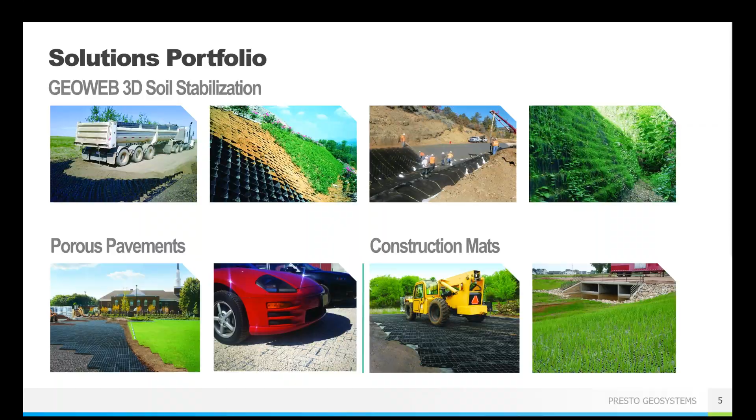First, I do want to go through a pretty general overview of what the GEOWEB soil stabilization system is, for those who might not be familiar with this type of product. Like I said, it started in the 1970s, but it's still a little bit unknown in some areas, so I want to make sure we're all on the same page. The GEOWEB system is our version of the Geocell technology, and it consists of two main attributes to be aware of. The first is going to be the cell or the container size. The cells come in three diameters, small, medium, and large, along with cell heights between 3 and 12 inches. And these dimensions are going to depend on your project specific details, if you have vehicle loading requirements, what your slope angles are, that sort of thing. So we can help you determine which one is going to be the most appropriate for your specific job. There is no one size fits all.

Another thing I want to point out is the ultrasonically welded seam, and that's where all of these connecting points are. The stronger your seam strength, the better the performance the Geocell is going to have. A strong seam allows for heavier infill materials, steeper and taller slopes, and better overall lifetime performance. The GEOWEB panels are produced using a high-quality virgin high-density polyethylene, HDPE resin, for consistently strong welds at every cell junction, while also maintaining semi-rigid ductile properties within those cell walls. If you have too stiff of a cell wall, it can lead to overstressing of the seams and the potential for cell rupture or failure.

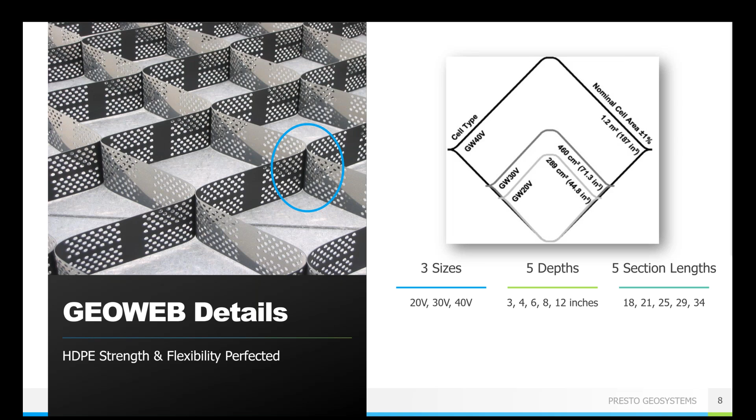So our Geocells do not use any fillers or exotic polymer alloy blends, which can ultimately reduce your weld strength and other components such as your environmental stress crack resistance, your ESCR. These types of things, the fillers, alloy blends, are sometimes offered in some of the competing products that are out there in the name of increasing the cell wall stiffness. So to avoid weld failures and the damaging effects of differential settlement, uniformity in performance across all the elements of a geocell system is going to be much more important than focusing on a single characteristic such as cell wall stiffness alone.

The second attribute that I want to mention for the GeoWeb system is going to be the infill materials, what you're putting into every one of those containers. So there are three main infill types that can be used with the GeoWeb system, depending on the type of protection that you need at your site. You can use topsoil, aggregates or other granular soils, and then concrete. So in most cases, this is going to allow for the use of on-site, salvaged, or site-won materials. You can reuse what you've excavated without the need to import fill.

So all three types can be used for channel protection. Typically, we do see topsoil as the most common. Usually for aesthetics, you get a nice green slope, green channel, looks really nice. But in some conditions, such as where you have very high flows, concrete might be the best option. So again, there is no one right answer as to what the infill type is. It's going to be what is best for your specific project.

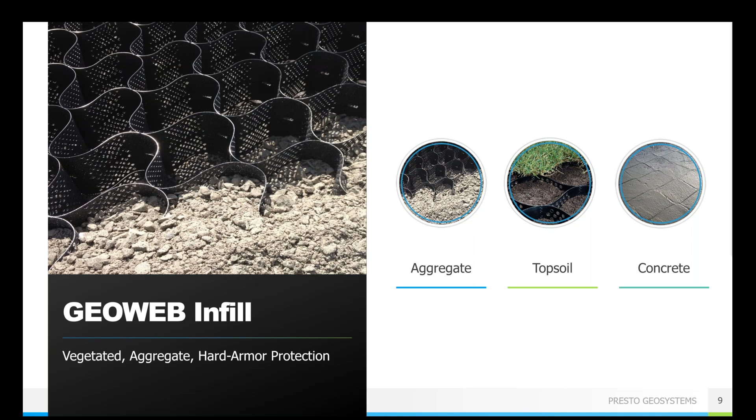And I do want to mention that the GeoWeb panels and all of the accessories that we're going to talk about in just a moment are 100% made in the United States under strict quality assurance and environmental control processes, sure to comply with any requirements in the Build America, Buy America, and the Infrastructure Investment and Jobs Act, IIJA. So if you are looking to get maybe federal grant money, if you're looking to try and match one of those requirements, if you do just have made in the USA requirements, that sort of thing, all of our products do meet those standards and are considered qualifying products for those types of applications.

And then a general note when you review any product spec sheet for geocells or really any geosynthetics is that you want to pay attention to see if there's any disclaimer language, any of that fine print, usually at the bottom of the page. Something that we've noticed recently, a concerning trend in the industry as a whole, is where low-end product providers will present performance data that appears to be equal to the industry accepted standards at first glance, but then they add a disclaimer along the bottom in fine print saying something like specifications can change without notice, or information is for general purposes only and not intended for design. Things that basically say, we don't have to meet these specifications every time. And so you just kind of want to have a heads up for that.

First one I want to mention is going to be the ATRA key, and that's A-T-R-A, ATRA. And it is our first component for a completely integrated system. It connects each individual panel of the GeoWeb into a single web that covers your entire project area. It allows for faster installation of the panels and will last the lifetime of the project, ensuring that your area, your channel, is protected and that the GeoWeb system is not going to fail under the anticipated loads, whether that be vehicle loads, water loads, hydraulic loads, anything like that.

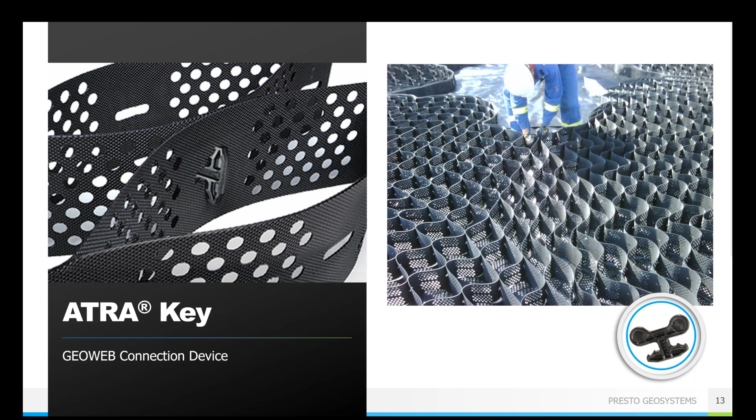So the specific engineering values of the ATRA key will ensure that the system holds up to loading over time without the corrosion that are seen with metal staples or the failure of underperforming cable tie systems. So there are competing products out there. They do have other connecting mechanisms, but they are just not as strong, not as long lasting, a lot more difficult to install, that sort of thing. So just something to keep an eye on, especially if you do see those substitution requests.

So the next thing we want to look at is going to be your anchorage options. So when the GEOWEB panels are laid completely flat, the anchorage is really not needed. The panels are just going to hold themselves to a flat surface. But as your slope angle increases, you do have to worry about slumping or sliding down to the toe. You don't want that. So for shallow slopes, so think a 2 horizontal to 1 vertical, about 26 degrees or shallower, you can use stake anchorage as your option. That's usually going to be sufficient.

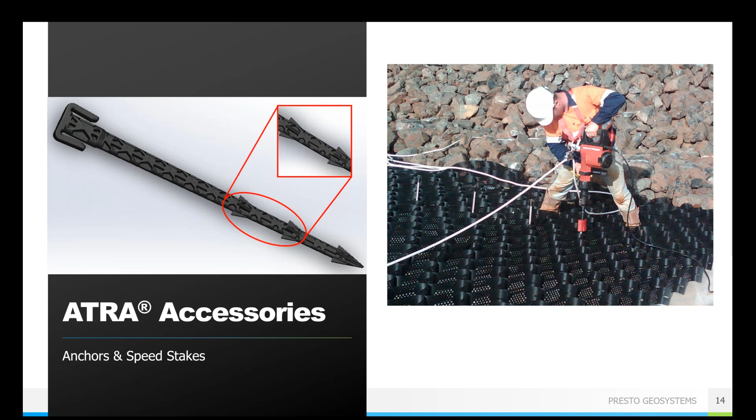So if you do have a steeper slope, if you're going steeper than a 2 to 1 horizontal, you can go with the tendon system. This is also great if you are going over a liner. If you have some sort of geomembrane liner that you don't want to puncture, going with the tendon system gets you away from stakes. Stakes would puncture the liner, obviously not helpful. But so the tendons are a great option because they are a load transfer device. So they carry the load from the panels all the way up to the crest of the slope and are carried there by some sort of crest anchorage system. Think a dead man pipe, earth anchors, that sort of thing.

And so the ATRA tendon clip, which is very similar to the ATRA key, but is made specifically for this tendon anchorage system, is designed to fully transfer the forces that are placed on a geocell. And all of our accessories, the ATRA key, the stakes, this ATRA tendon clip, are designed and tested specifically to work together with the GEOWEB panels so that we can go from problem to cross-section to construction solution with a system where the modeling replicates the real world forces. So this isn't an estimation. These are things that we know are going to work based on what actually happens out in the field.

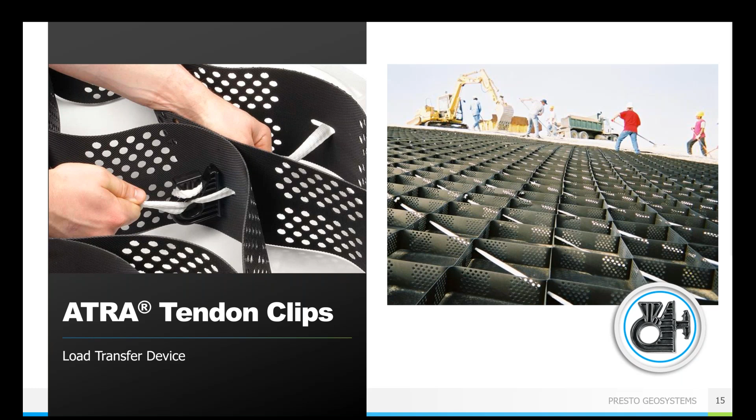I do want to do just a really quick diagram here. Let's just sort of walk ourselves through this, make sure now that we've talked about all of these things, we know how they're actually used. So I also want to sort of stress when I say channel, I'm going to be saying that a lot as we move forward here. I'm talking about protecting any type of area that includes the full width of a channel. So your channel bottom plus side slopes. You could do just the bottom plane of a channel, just the side slopes. Maybe you've got an embankment or a dam structure. Basically anywhere that's going to see some version of a hydraulic load, we're calling a quote unquote channel. Okay, just making sure we're all good on that.

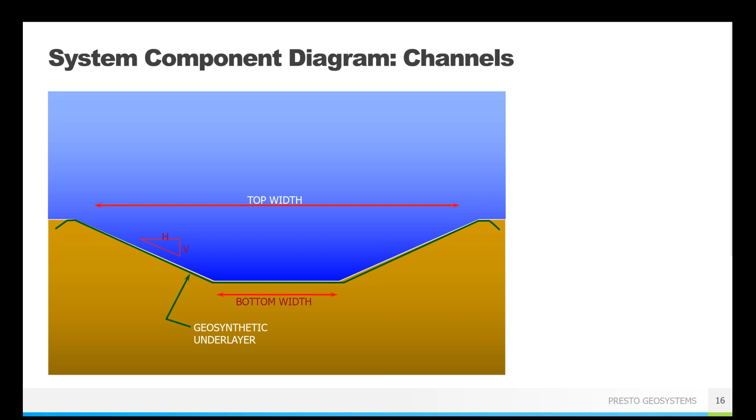So we have our standard channel here, standard dimensions, nothing fancy. Depending on what infill material you choose, we may recommend the use of a geotextile separation layer. Typically, we see these when there's a concrete infill. Sometimes it's necessary in other situations too. Again, that is something we can help determine on a project by project basis rather than a yes, you always need it or no, you don't always need it sort of thing. Next, you would place the GEOWEB panels themselves. They would go directly on either the natural channel soil or on that geosynthetic layer if you need it.

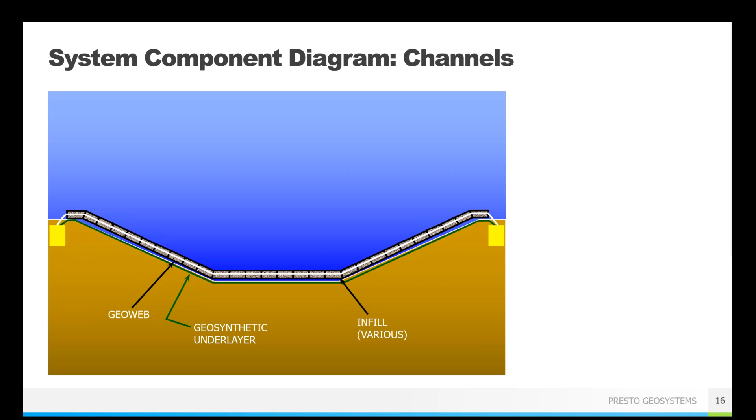You do your anchorage options. Again, you have 2 options. The first being those stake anchors, the ATRA anchor, or you can do the tendon system where you need some sort of crest anchorage, like I mentioned, a buried dead man pipe, earth anchors, that sort of thing. You would put in your infill. Again, you can choose between topsoil, a granular material such as stone, or concrete, and then you're good to go. Allow that water flow to come through and you have a channel. So lots of different options, lots of different things to go through.

But this is something that's why I'm here, and the rest of the engineering team here at Presto is here to be able to help you through any of the questions you might have about a system like this.

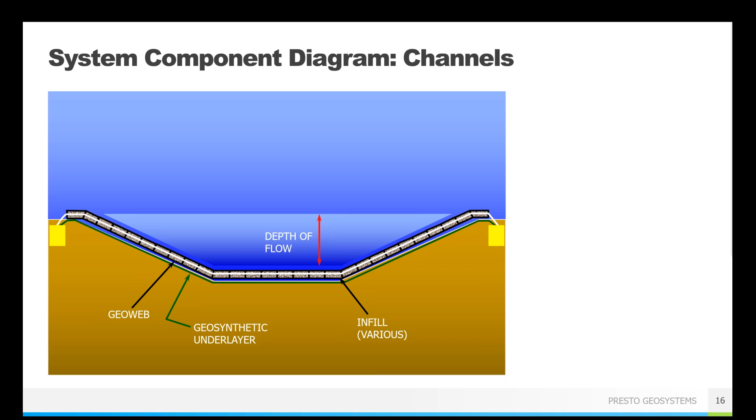And so the GEOWEB system is designed to create that stable channel surface, even when you do have your maximum velocities and maximum shear stresses occurring. So there are two ways of building up the GEOWEB protection system. The first is going to be what we call a single layer system. That's where the GEOWEB panels are laid directly on the channel, on the bottom, on the side slopes. They're directly on sort of the native soil of your channel or embankment.

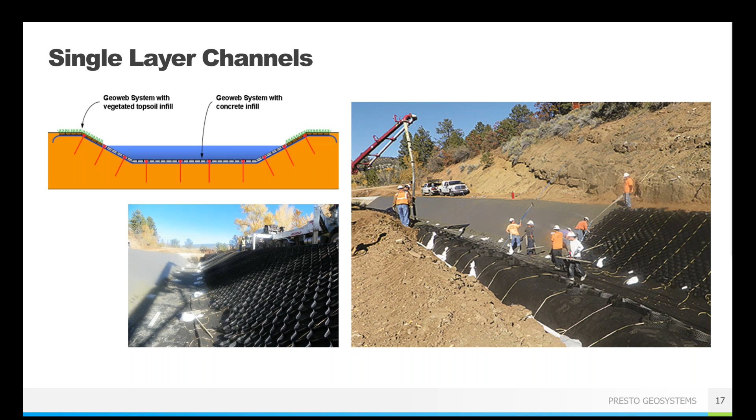And so this is great for areas where the slopes are a 1-to-1, so 45 degrees or less, but also as long as basically you have room for your footprint of your channel, this is going to be the most efficient way of protecting against erosion. But sometimes your space is limited, or the project area is maybe up against existing structures, like this home in this picture that you just can't move, you can't lay back that slope.

So when those side slopes are nearly vertical, the GEOWEB panels can be stacked on top of one another to create a retaining wall on one or both sides of the channel. The GEOWEB retaining walls can still withstand the same velocities and shear stresses as that sort of single layer channel, and they're still flexible enough to handle curves and changes in grade. So the retaining walls are not meant to be a limiting factor. They're meant to be a new option that you might be able to use.

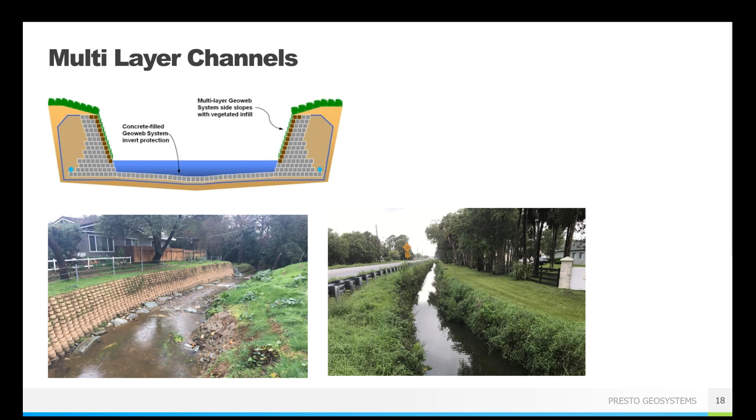So this is a great way to deal with making deep channels, or if you have very steep side slopes, all the way up to 80 degrees if necessary. And there are lots of options for mixing and matching how the GEOWEB panels are placed. So you can have a single solution for even complex sites. So just a great way to sort of highlight the flexibility of how the GEOWEB system can work.

And one more accessory, because we don't have enough, right? But one more thing that really helps pull everything together with the GEOWEB system is the ATRA wall key. So this is a new design that we've made specifically for these retaining wall type of structures. And they're intended to be the color of the fascia and are large enough to completely cover the slot that's necessary to hold all of the different panels together to create a more aesthetically pleasing wall immediately after construction, but

prior to vegetation growth. So it just helps hold everything together, makes it look a little nicer, and again, is designed specifically to work with the GEOWEB system and make us one of the industry leading standards for how these type of systems come together.

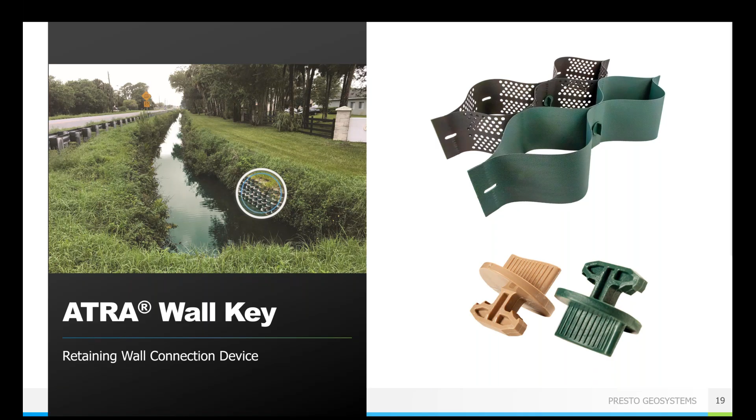All right, so we've now done our good basic overview of the GEOWEB system for its embankments and channels. So let's dig a little bit deeper into the capabilities and functions of how each infill type works. So we're going to start with vegetated infill. So this is where you're going to get your grass surface. So one of the best things about the GEOWEB system is how much trust we have in the system working for your project. That's because we have the experience and research to back up what we're saying.

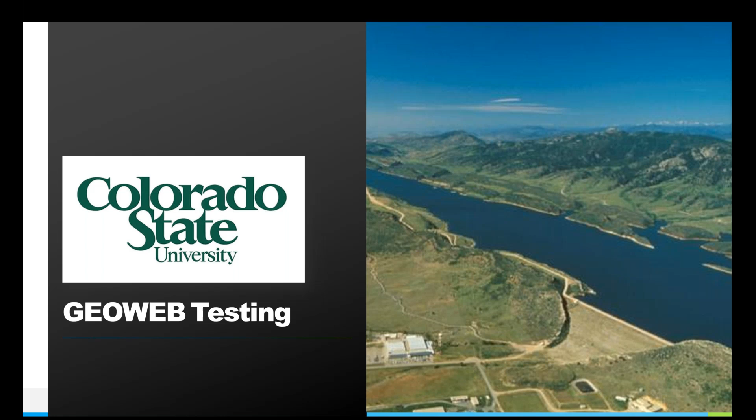A huge series of tests were completed at Colorado State University in Fort Collins, Colorado, under the direction of Dr. Chris Thornton. CSU is considered one of the top hydraulic research facilities in the world. And the facility is unique. It's kind of cool because it's located underneath the Horsetooth Reservoir in Colorado, and it's a couple hundred feet of static head. So it can achieve extremely high velocities and shear stresses in both their indoor and outdoor flumes. So this is a great place to do testing for geosynthetic research.

We started with vegetated testing, and it was performed with two different objectives in mind. The first was the ability to withstand high velocities and high shear stresses, the main components that you're thinking about when you're trying to withstand that water flow. But the second objective that we wanted was to compare the performance of topsoil filled GEOWEB panels versus riprap or other conventional solutions, such as erosion control blankets by themselves.

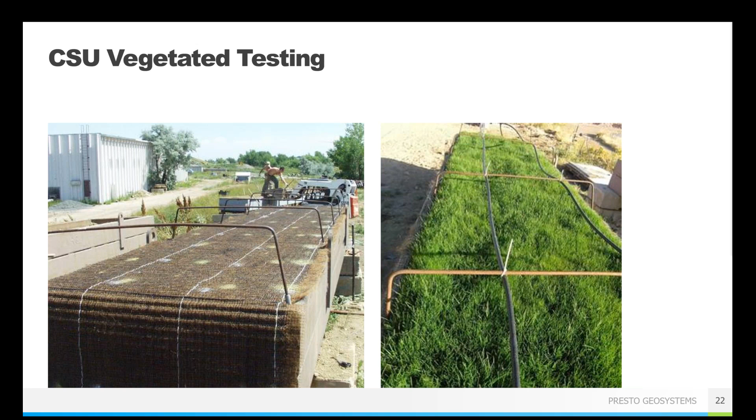So the testing consisted of using a 6-inch deep GEOWEB panel filled with topsoil, and in this case, they also did a surface protection. They did a turf reinforcement mat over top of the filled panels. And this is probably our most recommended cross-section for this type of application, so that's why we did the testing for it. And vegetation was established and grown to about a 6-inch deep grass section. This is going to replicate your typical field conditions where all that grass and all that vegetation is fully grown in and giving you that protection.

So testing consisted of 10 one-hour tests, which were performed in the outside flume at Colorado State University under varying conditions, including adjustable flow rate and bed slope angle. So the testing was done in accordance with ASTM D6460 standards, which covers both soil loss through scour and overall blade density. So the ASTM standard considers a successful test when you have less than a ½ inch of topsoil loss and at least 300 blades of grass per square foot after the test is completed.

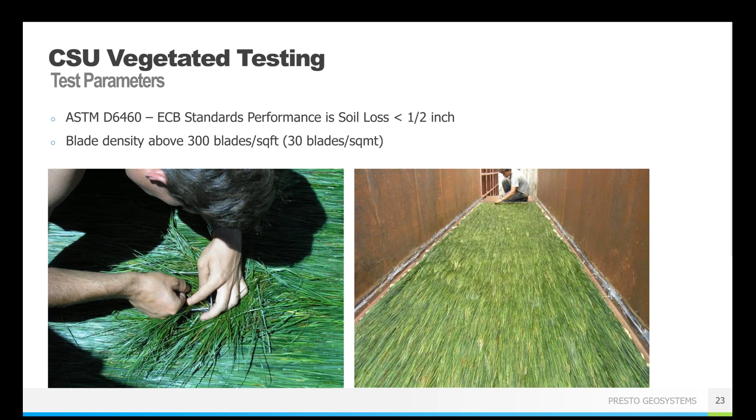Blade density is important since it doesn't really help if the soil stays in place, which is good, but then there's no grass growth, which is bad, because then you're just ending up with a muddy looking channel, which is not the point. But we can say vegetated channels do hold up very well against even turbulent flows, such as around corners or near rough terrain.

Most people would think a vegetated channel can't actually handle significant water flow, but when it's properly confined in the GEOWEB system, along with a surface protection method, velocities of 30 feet per second and shear stresses of 16 psf can be achieved. And so this is actually one of the tests, that photo there. The GEOWEB filled with topsoil and grass is underneath all of the water in that flume. You can see the water is deep enough that you can't even really tell that there's anything underneath it, but I promise it's under there.

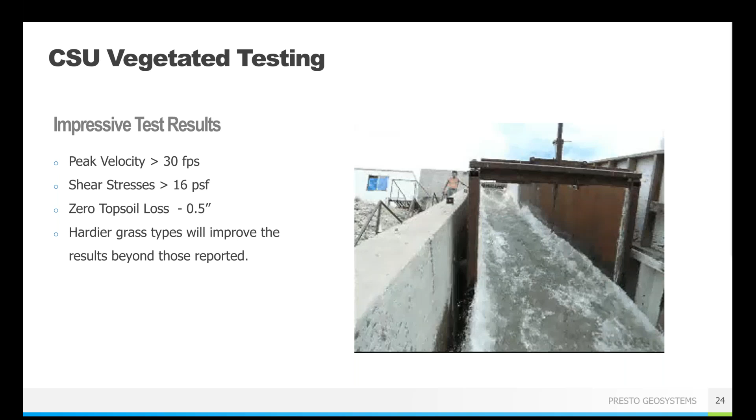And so obviously there are lots of different types of grasses that you could choose to put in here. If you choose a hardier variety, that is going to help. But really the more important thing is to choose something that you know is going to grow in your area and in your climate, something that's going to blend nicely with the area surrounding it so it doesn't look super odd. You know, I'm not sure you want to put Kentucky bluegrass if you're in New York City. That's not necessarily going to look cohesive. It'll work, it'll function, but it's just going to look a little more obvious, I guess is what I'm going for. All right.

So what we did determine is that when you pair the GEOWEB system with a surface protection method, you can resist extremely high flows, again, up to 30 feet per second, and those shear stresses of 16 psf. And so compare this to an allowable 4 feet per second when you have unconfined vegetated channels, so when you just have a natural soil channel. And so you can see that's a massive improvement.

The surface protection, in this case, this was a TRM, prevents the soil from scouring out of the cells, while the GEOWEB prevents those super saturated soils from washing downstream during your high flow events. So it's a good combination to have both, and that is why it is our most recommended cross section. But you can get those really, really great results. 30 feet per second is massive.

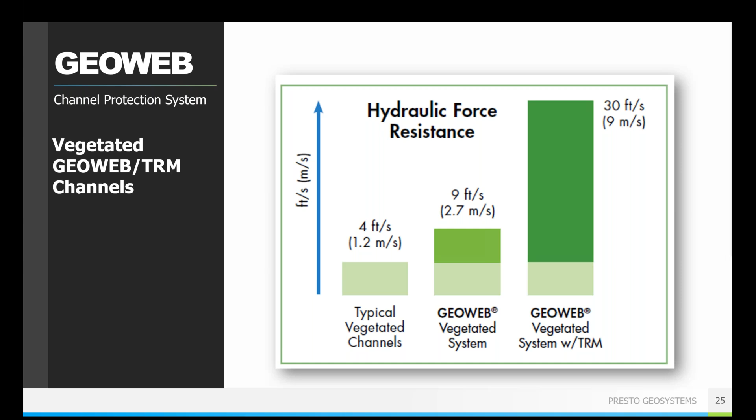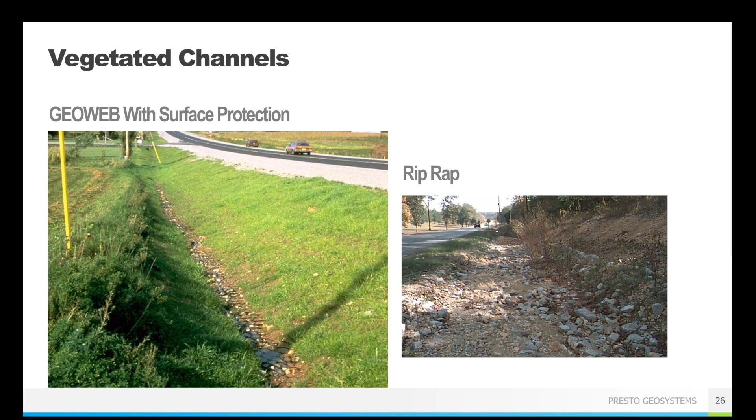So northern Canada is definitely a cold weather environment. And so the GEOWEB system actually stands up really well against cold. It does well with snow, frost heave, ice buildup, any of that stuff. So you can allow for that ice buildup to happen. You can let the snow fall on it, anything like that. It's not a concern. The GEOWEB panels themselves are not going to become brittle and break in cold weather environments.

They are able to withstand that. So you don't have to worry about it cracking or anything if it does get very cold, kind of like today. So those cold weather environments are not meant to be a concern. It shouldn't be, again, that limiting factor.

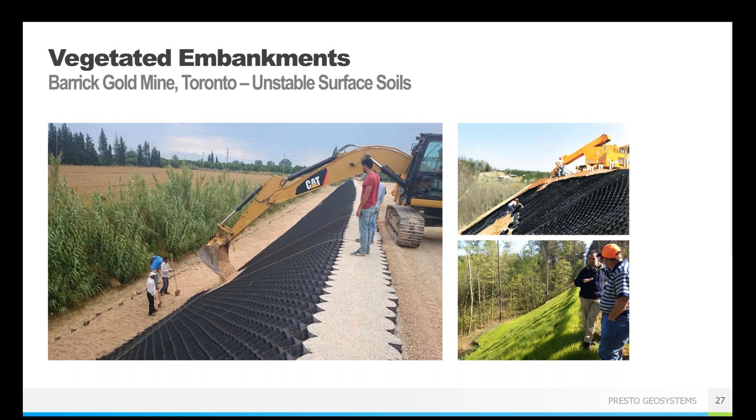So this is another great thing about the GEOWEB system, when you do have space constraints. So if you've got, like in this case, an access road at the top of the road, but maybe you have another one at the bottom of the road, or you have other infrastructure such as bridges or trees, fencing, anything like that that you need to be able to work around, something that says I can't lower the grade of my slope, I have to work with this steep slope. Put the GEOWEB system on top of these steep slopes so you don't have to worry about erosion, and you can work around and with existing or new build infrastructure.

So you can have that guardrail at the top. You can go right up against those bridge abutments, anything like that. So you have a lot of that flexibility in working in the space that you have, so you can try and minimize the amount of additional work that you might need to do.

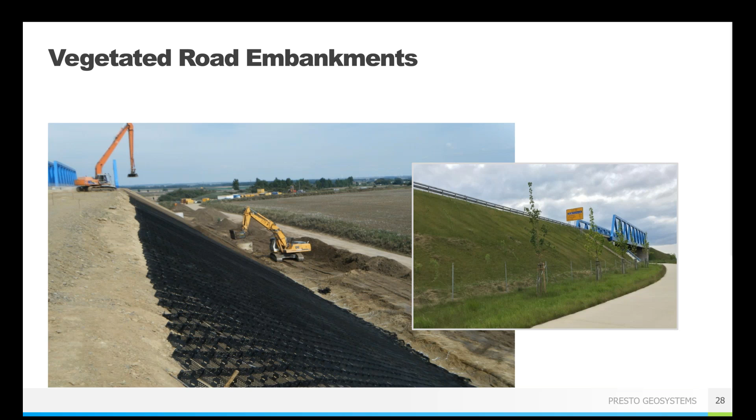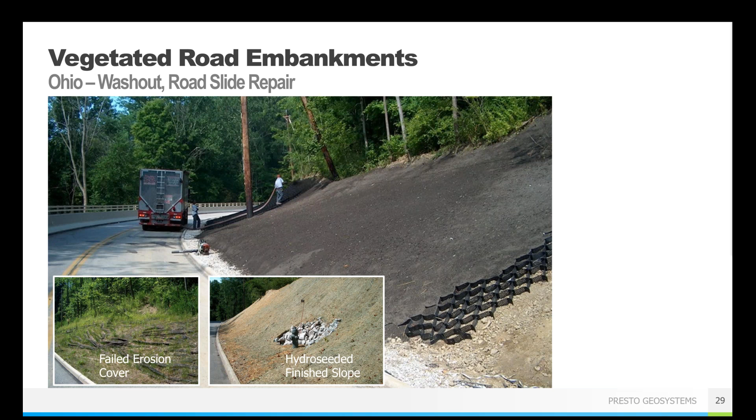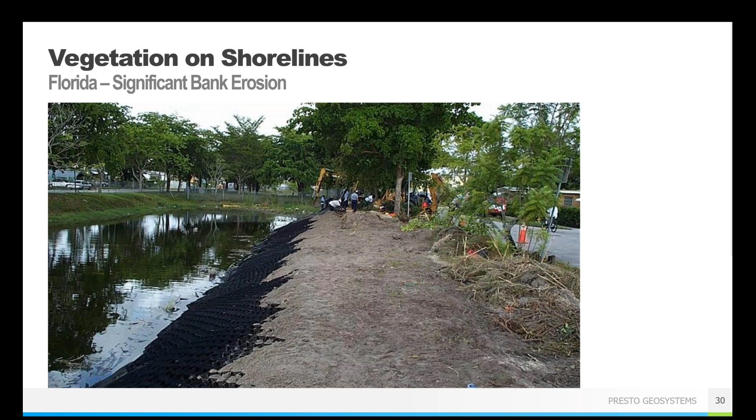And you can see that there is existing infrastructure all the way around this channel. So the city was actually trying to come up with this solution to keep the water within its banks without having to constantly come back and rebuild those side slopes after those hurricanes, because frankly, they had bigger things to worry about. So the GEOWEB panels are placed both above and below the normal water line in this type of project. The panels should go below that water line to ensure that they don't get lifted up due to wave action. And that way you're protecting your entire shoreline slope all the way down to the channel bed. You don't have to cover the channel bed, especially if it is always covered in water. You do just want to cover that side slope.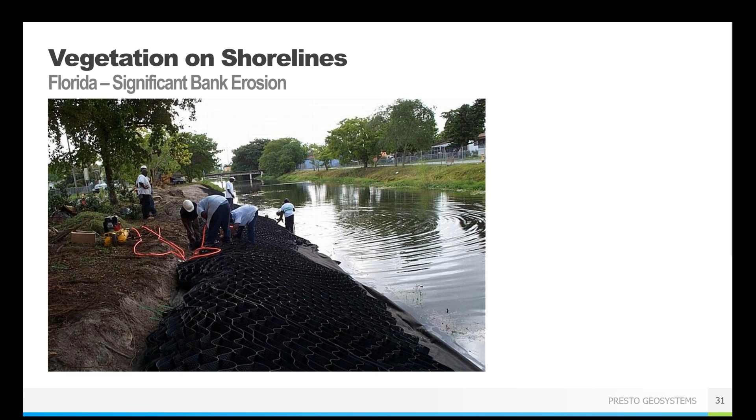And you don't actually need to do dewatering. You can see these guys here are working in a fairly flooded channel, so you don't have to worry about having to put in a cofferdam or dewater one of these channels to do this type of installation. The GEOWEB panels themselves will sort of initially float, but then you can anchor them down either with stakes or some other weights to hold them in place. And then once they're anchored into that slope, they're not going anywhere.

Then here you can see that final surface once the vegetation has been established. So the performance of the GEOWEB system allows it to handle those fluctuations in water depth and the associated changing velocities and shear stresses while preventing erosion along those side slopes. Using a soil and grass that was local to the area, in this case they actually used excavated soil, is going to help make it blend in so that the GEOWEB panels aren't noticeable. But now you can walk along the shoreline without fear of sinking in, and the shoreline is protected against erosion for years to come.

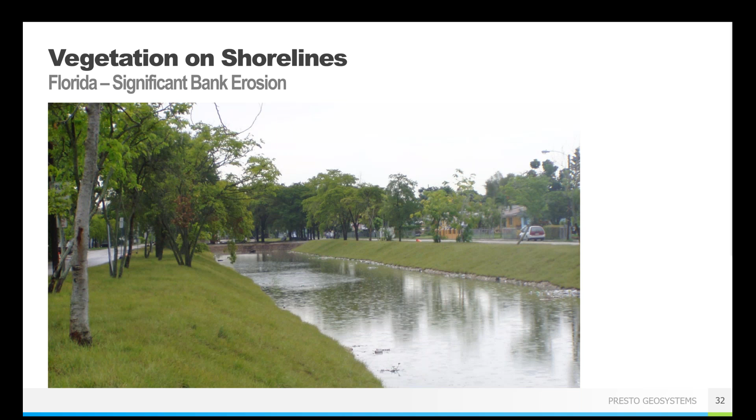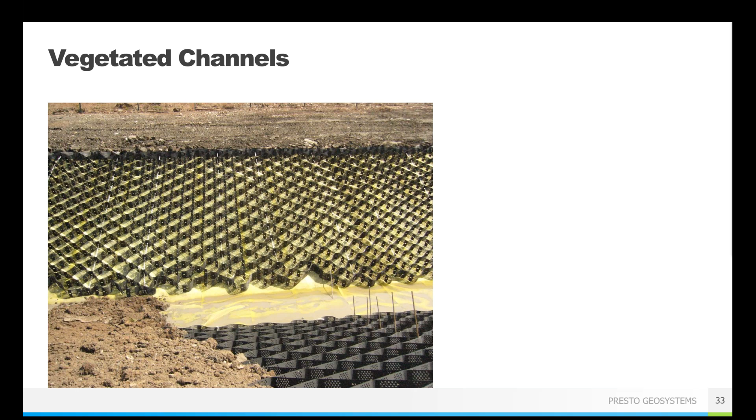let it vegetate, and your liner is protected, and it's going to do the function that the liner needs to, be impenetrable, not allow water or chemical leaching, anything like that. But now it's vegetated, it looks nice, you don't have to worry about damage to the liner over time, everything like that. And you can do pretty standard maintenance with this, or with any topsoil filled GEOWEB system.

If you need to do lawn mowing, you can. A walk behind or a ride on mower is totally fine. Your standard landscaping maintenance is going to apply. Or if you put in those taller grasses like you see in here, you don't need to do any landscaping with that, and isn't that nice? So it's a way to really limit the amount of maintenance that you need to do. You don't have to worry about it anymore, and it's a great way to have that liner, let it do its job without having to worry about it.

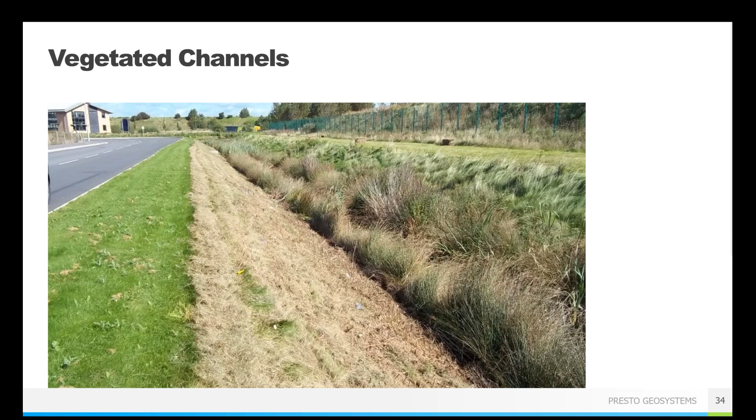A couple more case studies, actually. I got a couple here. So this was another channel. This was actually in the UK. This was an attenuation lagoon. It was at a former industrial complex that was being converted into a housing development. So the first phase involved constructing attenuation lagoons, which the permitting agency required to be vegetated.

So due to the expected flows, unconfined topsoil or a typical erosion control blanket by itself weren't going to be feasible. The flows were just going to be too high. It would cause erosion. So in this case, the 6-inch deep GEOWEB panels were selected as the appropriate solution, and they were anchored with tendons so that they wouldn't puncture the liners, and then filled in with that on-site topsoil and hydroseeded.

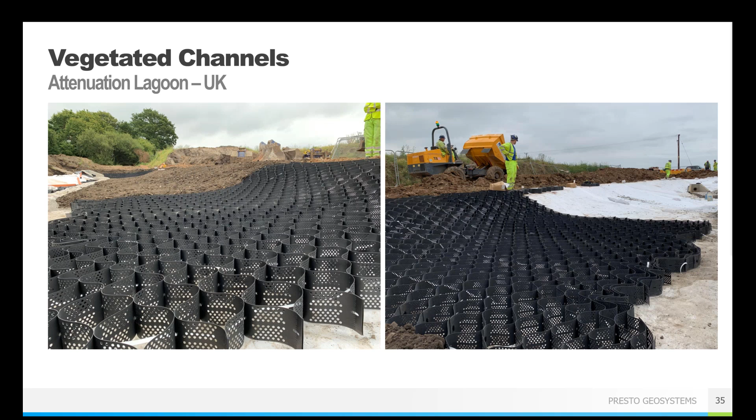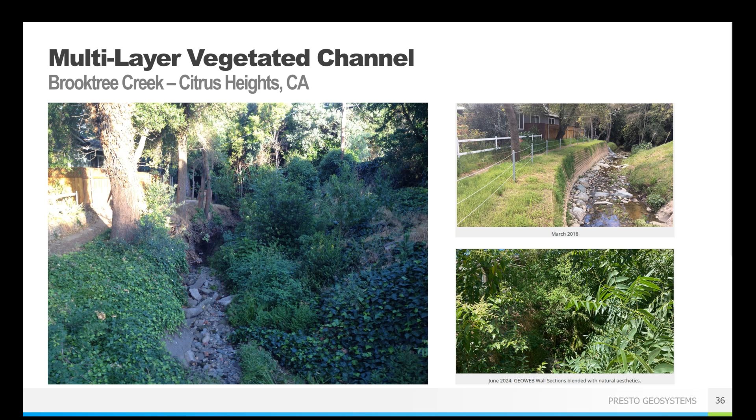Construction started by removing the oak trees with the exposed roots that couldn't be saved due to the excavation of the new channel. They saved as many trees as they could, but some of them were too far gone. And due to the proximity of the houses, a normal MSE structure with geogrid tiebacks was not going to be feasible. So in this case, Platipus percussion anchors were driven into the bank and then tied off to an anchoring deadman pipe. Kevlar tendons were attached to the GEOWEB panels and tied off to that deadman anchor to secure this GEOWEB retaining wall. And some geogrids were installed to help support this tall structure as well.

We're not getting into installation or design of retaining walls today because that is a beast all its own, but we do have other webinars about that, or feel free to reach out to us directly, and we are more than happy to talk details on constructing a retaining wall like this.

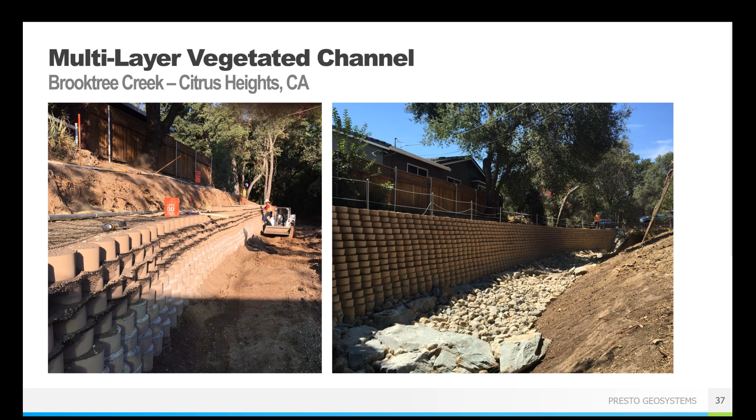In this case, the GEOWEB footing courses were filled with concrete to provide a non-erodible base because they were concerned about some of those high and turbulent flows coming in due to that stormwater diversion. And then the upper courses were filled with topsoil to provide that growing medium so that it would have vegetation. And this is what it looks like immediately after installation, and then giving a little bit of time, letting that vegetation come in. The system was completed in the fall of 2017, just in time for those winter and spring rains.

And then the channel has been exposed to several large rain events since then, and the wall structure has remained stable and the vegetation is becoming very well established. So you can see the photo on the right, pretty much right after that installation, and then the photo on the left is during installation.

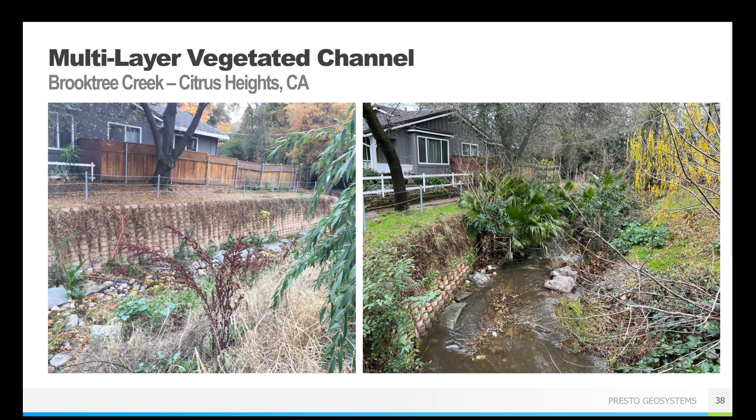Photo on the right was from 2022. So 4 years after installation, all that vegetation is coming in. Everything is standing strong. All right, so that was topsoil filled. Now we're going to move on to the idea of doing aggregate infill.

So these are permeable hard armor covers, and you can do aggregates, so it can be your stones, it can be really coarse sands, salvaged materials, that sort of thing. So again, testing was completed at CSU. They did both indoor and outdoor flume testing. And the main objective here was to determine how much the GEOWEB confinement can aid in reducing your riprap size.

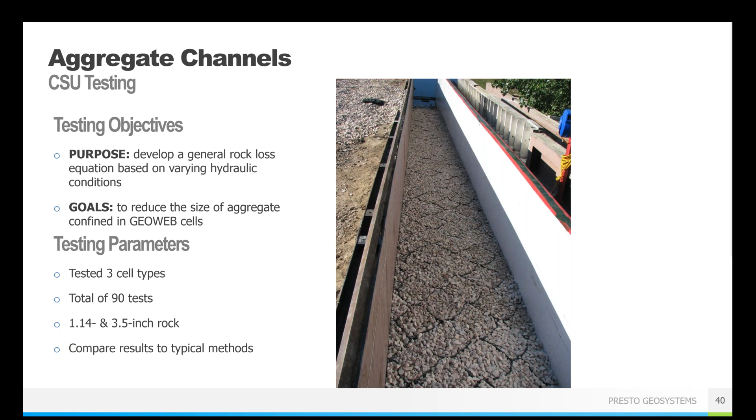So we looked for how well the aggregate stayed in place during the tests to determine the rock size that would prevent washout, because the system doesn't work if the stones get picked up and moved away. So the results were pretty impressive with the GEOWEB system working on steep bed slopes and allowing for high velocities and high shear stresses. In this case, you could allow for a max of 18 feet per second for velocity, and again, that's 16 PSF max shear.

If we remember when we were talking about the vegetated systems, those allowable velocities were around 30 feet per second. So the vegetated system can actually withstand higher flows and shear stresses than the aggregate filled channels. This might seem counterintuitive, but if you think about it, comparing the full grass, the whole root system, the whole lawn of a channel compared to a single stone, you can see where the difference is for that max velocity.

And so remember that the main objective was to determine the reduction in riprap size due to the confinement. Plus, vegetated channels can only withstand water on an intermittent basis, otherwise the grass has the potential to die. So if you are going with a continuous flow, aggregate is going to be the way to go. So there are differences between the two, why you might choose one over the other.

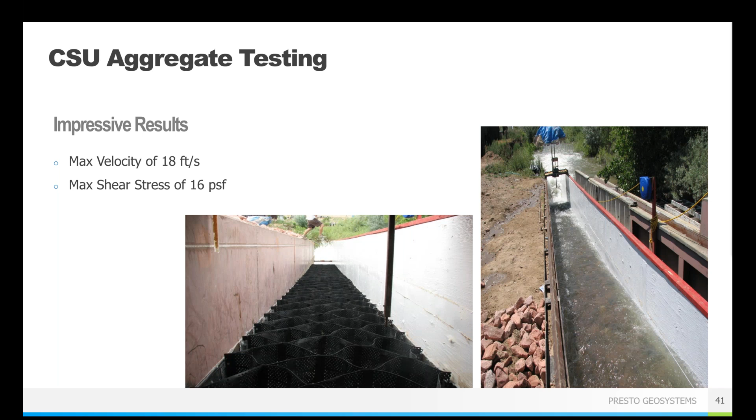So Dr. Chris Thornton did put together a design tool based on a regression analysis so that we can compare the reduction in crushed aggregate confined within the GEOWEB panels to a conventional riprap channel. So the tool is based on all of the testing data and allows us to predict the rock loss and the rock size based on those anticipated hydraulic conditions. What it comes down to is that we can recommend the appropriate cell depth and rock size for individual projects so that you can be confident that the aggregate that's placed is not going to wash away.

And so here, didn't really zoom in, but you can see how the results can look. Basically, this particular project used a 2-inch crushed aggregate confined in a 6-inch deep GEOWEB panel. And then the tool compares that GEOWEB solution to the riprap sizing using both the Abt and Johnson method and the US Army Corps of Engineers design formulas for what their riprap sizes are. So you can see those sizes were 10.3 and 16.7 inches respectively.

So for this job, the stone size reduction was between 5 and 8 times. So that's a pretty significant reduction, and it allows you to go from large engineered riprap stones to much more easily accessible crushed aggregate.

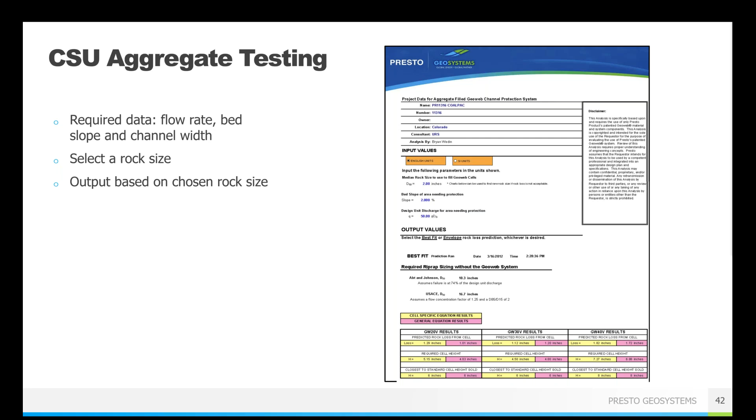So the Minnesota DOT used the GEOWEB system to help stabilize the surface around bridge abutments and along railroad tracks and crossings. And so the flexible nature of the GEOWEB panels means that it can easily contour to a slope face and around obstacles such as piles or abutments. And with the system in place, water erosion is prevented around those abutments, reducing maintenance costs.

And for this project, it was actually a mixture of topsoil with vegetation and then stone infill. So the stone was being used below the bridges where everything was in shade, grass wasn't going to grow. And then outside of those abutments, out in the other protected areas, they used topsoil with vegetation for that sort of natural green aesthetic.

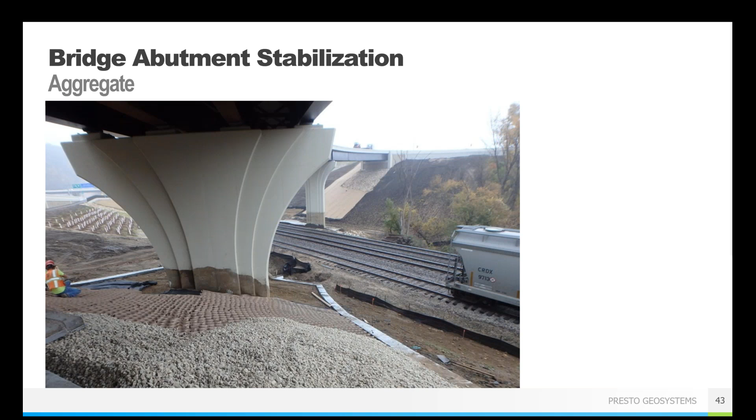Here's another case study. This one was for the Gila River Indian Reservation south of Phoenix in Chandler Heights, Arizona. Heavy runoff from some intense storms was leading to erosion and flooding in the adjacent subdivisions. Several existing embankments and channel sections had failed under a recent 100-year storm event. Repair time was critical to reduce flooding and prevent runoff. The channel length was about a mile long, and it routed water to detention ponds and natural drainage areas.

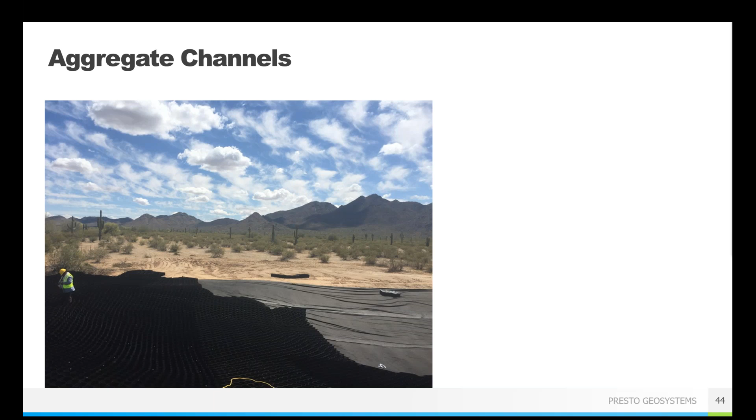The channel area was cleared of existing vegetation, and then the natural sand subgrade was graded and compacted. To prevent infill loss, a non-woven geotextile was installed under the GEOWEB panels. So that's where you might need that geosynthetic underneath the panels. Typically, it's going to be either a non-woven or a woven geotextile. In this case, that non-woven was used to help separate the stone infill and the native sand subgrade. Otherwise, there would be the potential that the stone would get pushed down into the sand, which would negate the effect it would have on protecting erosion at the surface.

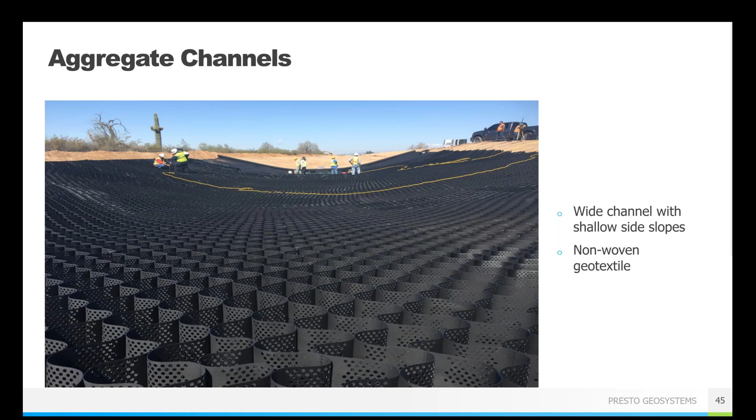This was a very wide channel. It was about 100 feet wide in some places with only 3-to-1 side slope, so really quite shallow. And the flow rate was intermittent and slow. In this case, anchorage consisted of using ATRA anchors, using number 4 rebar, so 1/2-inch diameter rebar, and our ATRA stake clips. One of the really nice things about the GEOWEB system is that it allows for in-field adjustments. Here you can see the GEOWEB cell depth is actually reduced from 8 inches down to 4 inches.

The second half of the channel away from the main inlet was subjected to significantly reduced flow rates and shear stresses. Because of that, less protection is required. So a shallower GEOWEB panel was used, which saved on cost and installation time while still meeting your performance requirements. And this is only possible because of our ATRA key, our mechanical connection device. If you were to use metal staples or plastic cable ties, they will not provide enough strength to hold that in place. And over time, those panels will separate, leading to areas of erosion in the middle of your channel.

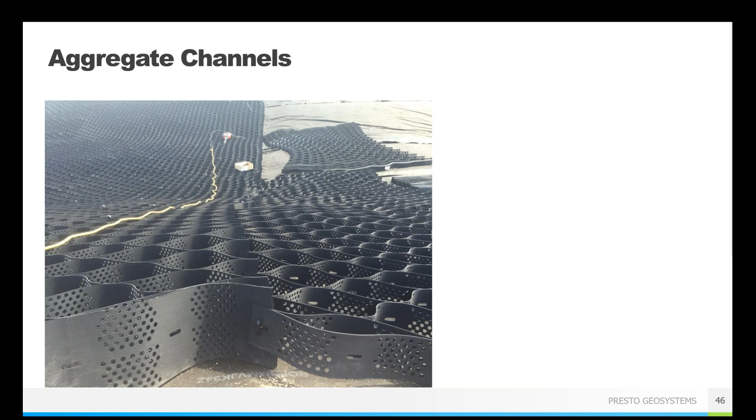The GEOWEB panels themselves are very flexible and can be easily cut in the field to allow for pipe penetrations. Here you can see some drainage pipes from a nearby detention pond. It's really simple to complete those field cuts of the panels to accommodate structures like these so that there are no areas left unprotected.

This area right below the drainage weir should be built a little more robustly since this is going to be an area with the highest potential for stone washout due to the turbulence of water coming out of those pipes. So this might be another area where you want to do a mix and match. Maybe you do concrete directly below the pipe outfalls. That way you don't have to worry about material loss in those really turbulent areas, but then transition into stone once you get back into laminar flow. So options to choose from, lots of flexibility to make sure that your project is going to get the best possible solution.

As a rule of thumb for installation, the crew was installing approximately 2,000 square feet of GEOWEB sections per hour with a 4-man crew. Add a 5th man doing infilling with a mini excavator, about the same. So just something to keep in mind if you're thinking about how long this type of installation might take.

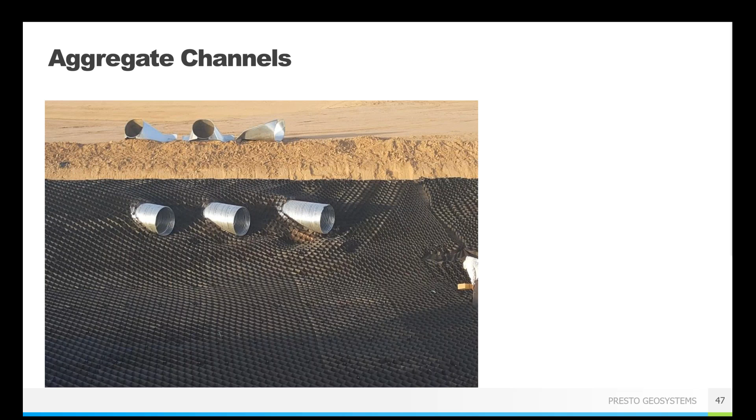In this case, the infill was waste rock from a nearby quarry. It's not going to be the greatest quality, but that is okay. When using the GEOWEB system, the rock does not have to be high quality engineered stone. The most important requirement is the size, which we're going to help you determine based on that regression analysis I mentioned, and also that the stone be angular. You want it to have some sort of lockup. That means avoiding things like pea gravel or garden stone, the smooth, rounded stone. That's just not going to lock up over time. Good angular stone is going to lock up to each other and make sure nothing gets washed away.

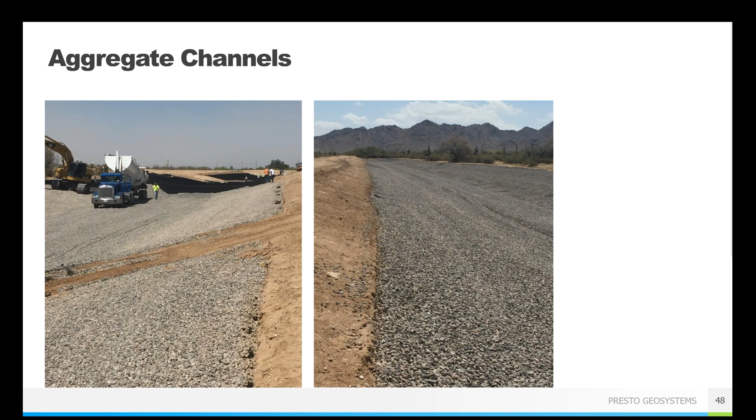And with the aggregate protection system, there is basically little to no maintenance required. Since that aggregate is going to be confined, it doesn't need to be replaced. And the channel is large enough to accommodate the large storms without overtopping. So now this is a permanent solution for this area, and they don't have to worry about having to come back in and do replacement of the material.

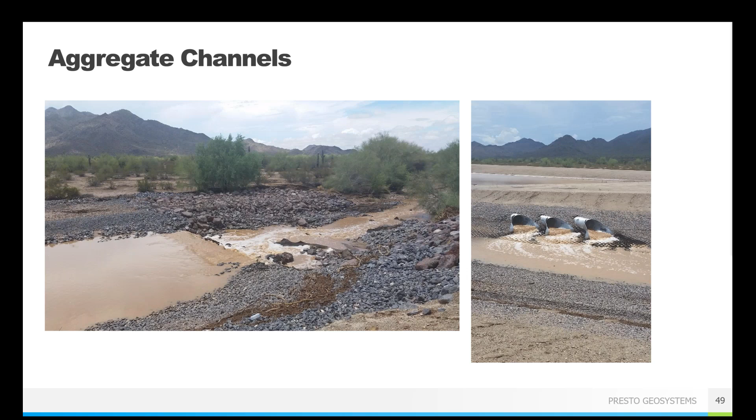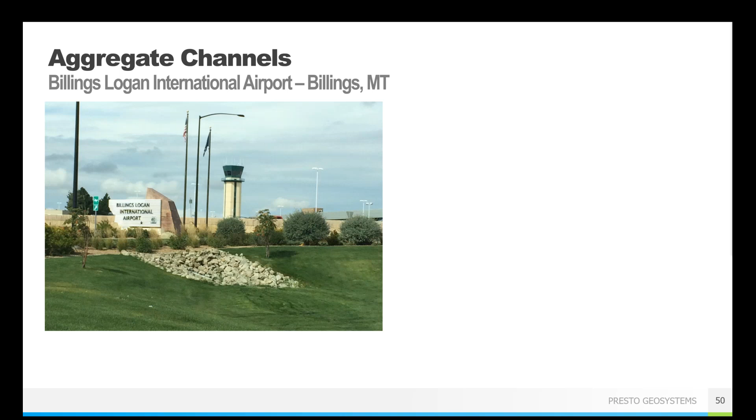Another project here, this was at Billings Logan International Airport in Montana. It was built on a sandstone rock with basically little to no topsoil. Any vegetation growing at this site was imported, and the high velocity runoff areas next to the takeoffs were causing some pretty significant erosion that needed to be addressed.

So the GEOWEB system with aggregate infill was chosen to protect the open channel from erosion during up to a 100-year storm event. And the open graded aggregate would allow for that stormwater to infiltrate through during low flow times into the existing groundwater. So this was designed to also be permeable.

In this case, 2 detention ponds were also built to control the stormwater runoff that flows from the channel. And the GEOWEB system was installed over a geosynthetic clay liner to help protect the banks of the pond against wave action and to provide that erosion resistance.

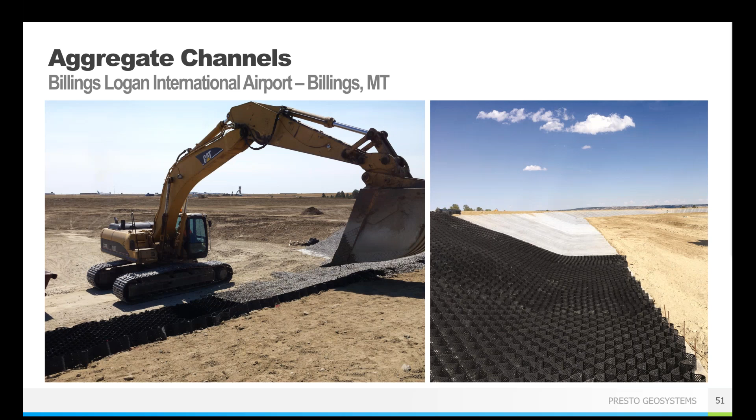So the airport is sloped at your pretty standard 2%. It had some large storm water pipe systems that had to be handled. So with that slope and those pipes, the challenge was lining these open channels and those high flow channels with that pervious material that wouldn't create ponding, but would still provide erosion control. So this GEOWEB system with that clear stone infill was a great fit to provide that desired infiltration without having to worry about erosion at the surface.

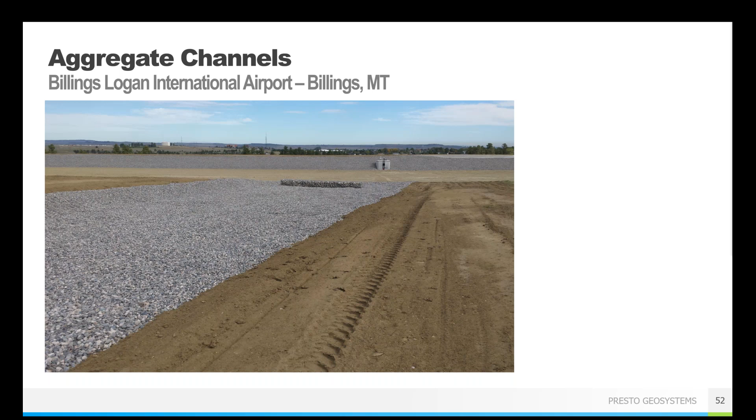All right, last thing I want to cover is concrete infill. We're running a little bit out of time, so we're going to go fast. So this is now doing impervious options. So again, testing was done at Colorado State University for those concrete channels. And one of the things that the concrete did was it actually overtopped the flume. So they were running so much water through the flume that it actually came up over the top. So it was more than the channel could handle.

So it maxed out that flume at 36 feet per second and a max shear of 21 PSF. So it doesn't seem that high, but the flume itself couldn't do any more. And again, this is one of the top research facilities in the world for this sort of thing. So this was as fast as you can get testing to go. So this is a great way to show that the GEOWEB system, when filled with concrete, is going to be the solution for any of your most challenging projects.

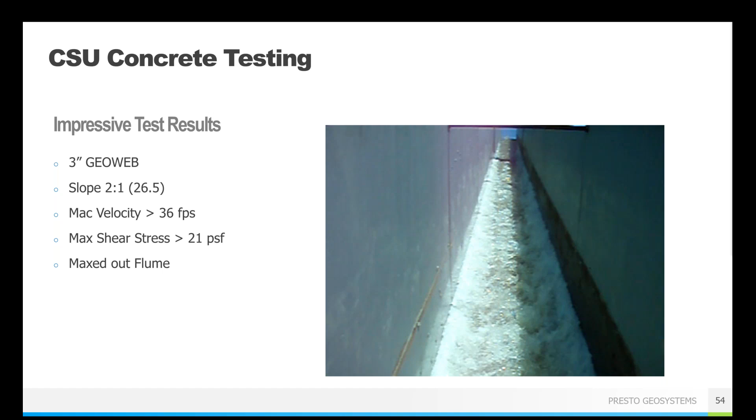It is something we are very confident in. It is the only geosynthetic that ever maxed out the flume at CSU, and that includes articulated concrete blocks, TRMs, gabion baskets, anything like that. So this is the best solution for those most challenging projects. So concrete filled GEOWEB is best when there are going to be those very high water flows.

So this was a channel project that took water runoff from a train intermodal yard. The GEOWEB system replaced a design that had 6-inch reinforced concrete channel bottoms and then 4-inch deep grout bags on the side slopes. So the GEOWEB system was a value engineered solution due to cost overruns. And the 6-inch reinforced concrete was recommended in the channels and then the grout bags on those 2-to-1 side slopes, but the owner wanted something new.

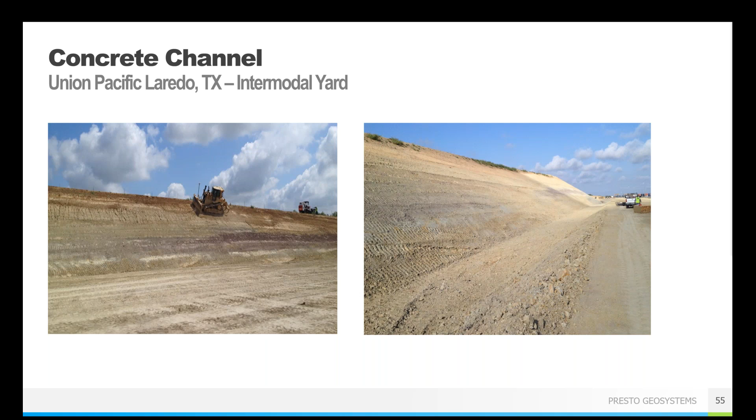So the GEOWEB system actually saved the owner a couple million dollars, not bad, but more importantly, sped up construction and allowed the yard to be in service significantly faster than originally planned. So the side slopes of the channels ended up using 3-inch deep GEOWEB. So they went from 4-inch grout bags to 3-inch GEOWEB anchored with stakes. And then the bottom of the channel used 4-inch deep GEOWEB. So it went from 6-inch reinforced to 4-inch GEOWEB concrete. And it didn't actually need any additional anchorage along the bottom.

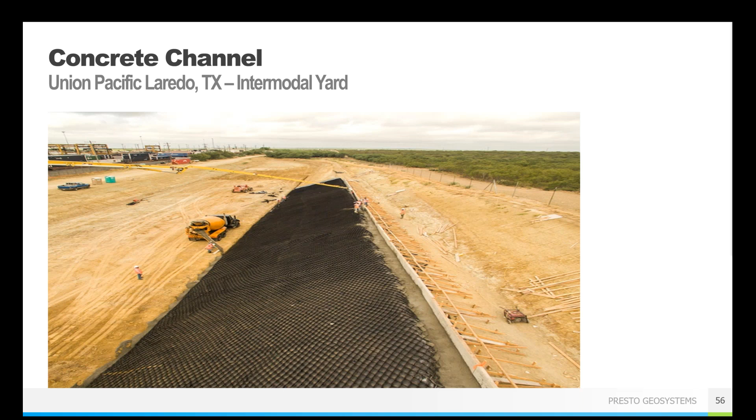The 4-inch deep concrete can support clean out equipment. So you can drive on this system once that concrete is cured. So it's another way to have that flexibility and versatility of the GEOWEB system to create the right solution for your specific project requirements. And the GEOWEB panels do act as their own form for the concrete, so there's no need to build additional formwork. And formwork on slopes can always be a little tricky and usually extends your pour times, your construction times.

So the concrete is poured directly into the GEOWEB panels from top to bottom, and then the cells hold that concrete in place and prevent it all from slumping and creating areas of uneven thickness. And speaking of thickness, an advantage of the GEOWEB system is that it assures consistent placement thickness across your entire project area. Pore pressure buildup is always a concern underneath concrete structures, so this project included drilled weep holes through the set concrete to relieve that pressure.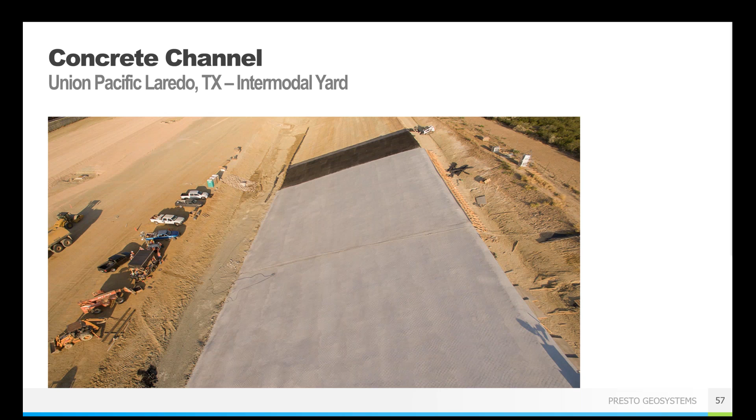There are some other options for relieving pore pressure that you can use as well. Again, something we are more than happy to discuss with you on a project-specific basis, but just something to keep in mind when you have concrete structures is that you do need to make sure you are relieving that pore pressure. Then here we can see that the full extent of the project covered more than 1 million square feet with the GEOWEB system and saved the railroad a significant amount of money and installation time, all good things.

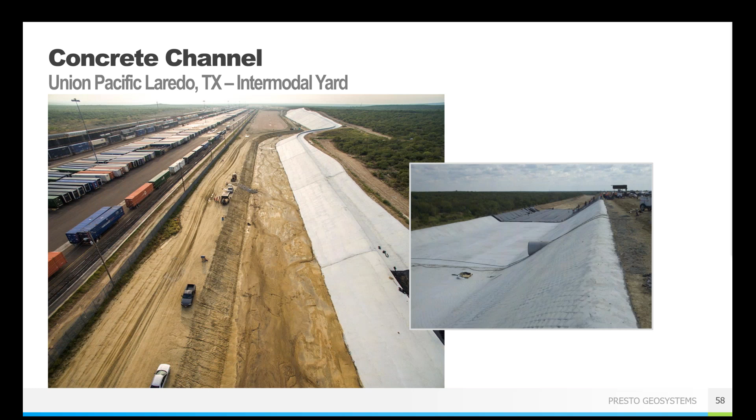And so then this is one last section. I said the last one was, but this is actually the last section. And it's highlighting two special cases, including pipe outfall areas and then those really, really high flow situations. So outfall areas can be challenging because they typically have high velocities and really high shear stresses, more than the channel does as a whole. And so the water in these areas is typically turbulent rather than nice and laminar and smooth. And that could lift up stone or soil and cause excessive erosion.

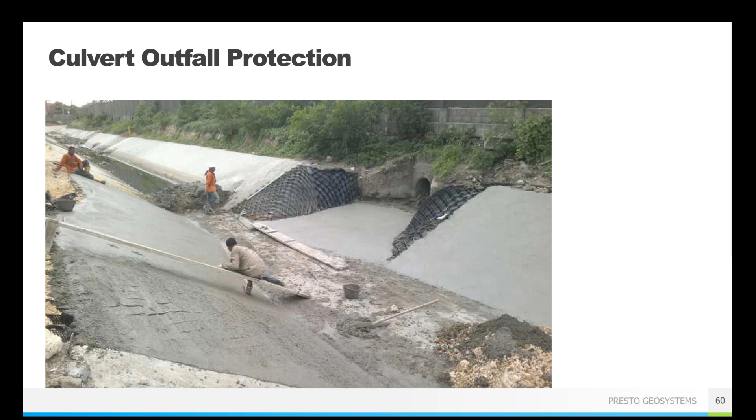So using the GEOWEB system can help mitigate these concerns, especially when you do use concrete in the outfall areas. And so the option to be able to mix your infill types is really beneficial in these areas. Use concrete around your outfall area and then transition to vegetation or stone for the rest of the channel for that great aesthetic appeal. The GEOWEB system can be used in conjunction with large riprap stone as well when there is that potential for high flows.

This was a culvert outfall in Milwaukee, Wisconsin. So strong surface protection was placed over the panels. In this case, they used a coir fabric, and that can help withstand those high flow events as well. And these are intended for short duration events, so just during your high intensity storm that you'd have these really high flows going over the system. Otherwise, you're probably going to want to go to concrete if you know that you're going to have consistently high flows. So just something to keep in mind.

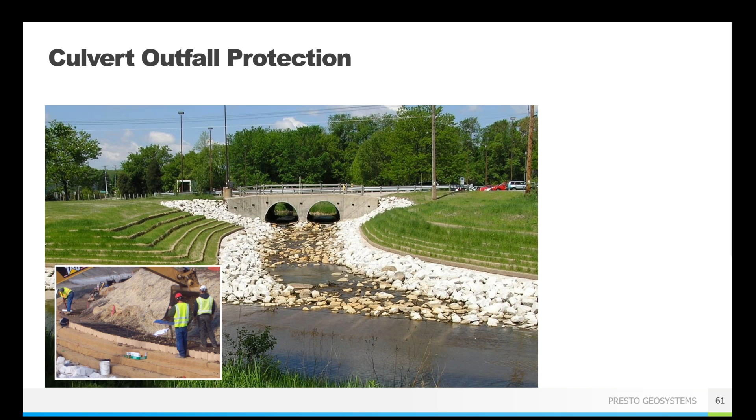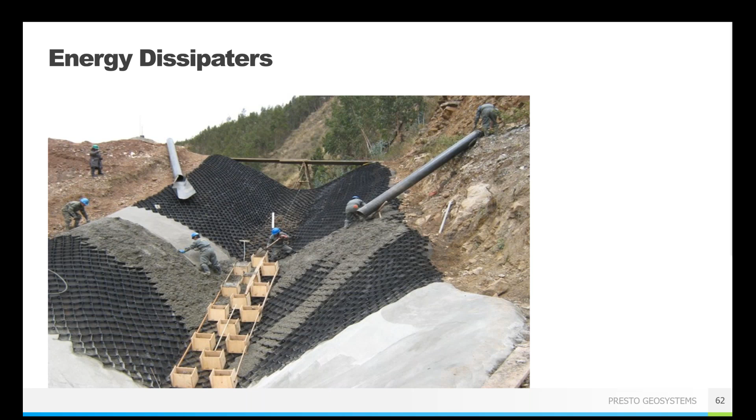Then the last thing I want to mention is when you need to have energy dissipation. So if you are in those very high flow events, but you need to slow that water down because it's going into maybe a natural groundwater system or into a smaller diversion pipe system, any number of reasons, energy dissipators are going to be the way to go. And you can insert those directly into the GEOWEB system. So you can place them on really steep slopes, shallow slopes, around curves, anywhere that they're necessary. And you can put them in any number of different ways.

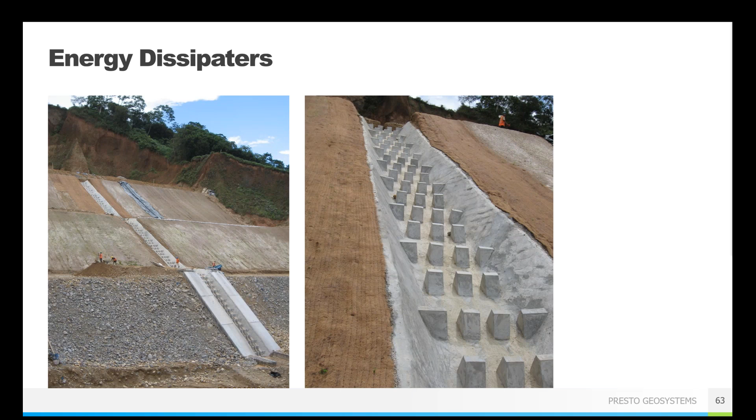You can form them in as you're pouring the concrete. You could do low tech and just throw some boulders in there and grout them in place. Number of different methods. We can help you determine if they're needed, how many, spacing, sizing, all of that sort of thing. That is obviously highly project dependent, and you can determine the most appropriate way to get those into your system. But they would be used with the concrete filled GEOWEB. You wouldn't use them with stone or topsoil infill because the flows are just going to be too high and too turbulent around those dissipators. So just something to keep in mind.

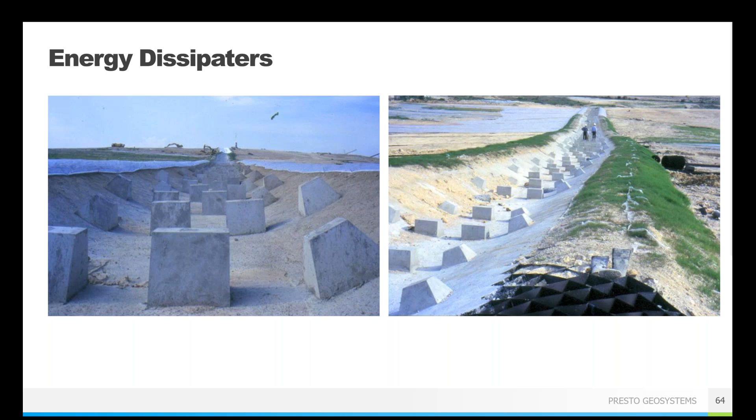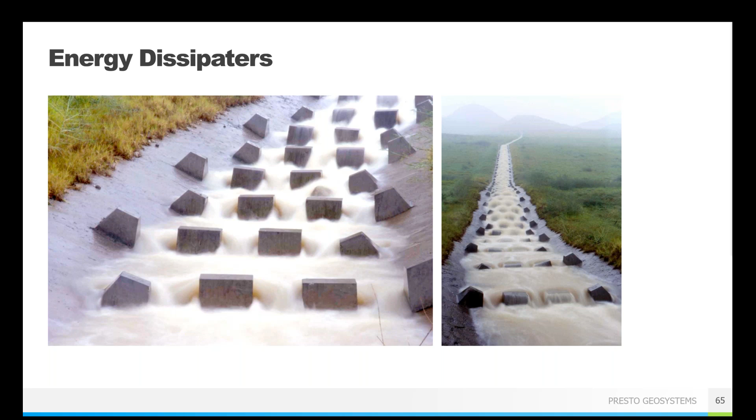Like I said, there is no one right way to do those energy dissipators or to put them into the GEOWEB system, but we are more than happy to talk with you about that on a case-by-case basis. But you can see you can have some pretty intense flows coming down through here. This was actually a project in China where they were bringing water across a really long field, and it was going into a natural detention pond, so the flow needed to be significantly reduced. So all of these dissipators were helping with that so that the flow was pretty much near zero by the time it reached the end of the channel. All right, so in summary, the GEOWEB erosion protection system is great for channels.

It has great flexibility of construction. We have a variety of infills to meet your project needs. We can fill the GEOWEB panels with topsoil, aggregate, concrete, anything you need to help protect against that surface erosion due to high velocity flows. And all of our evaluations are backed by over 35 years of experience and extensive research and testing at Colorado

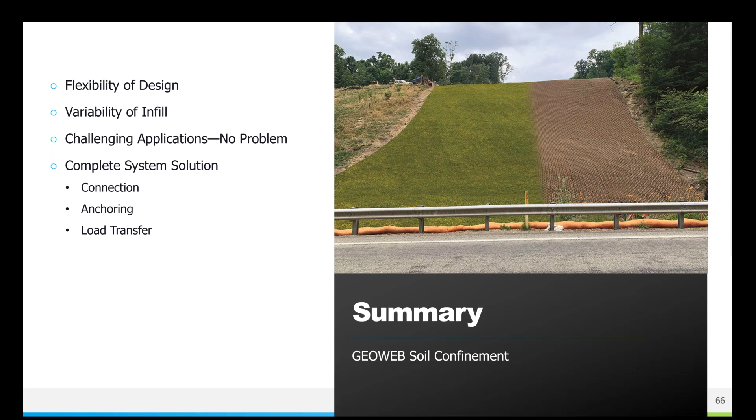State University. If you are interested in any of that information about the testing that was done with Dr. Thornton, please just let us know. Summaries are available on our website, and then we have more information that we can share as well. So we are happy to share this information. Let it be something that you can use to talk with regulators or other people who are interested in doing this type of work to make sure everybody feels comfortable that these are solutions that are going to function.

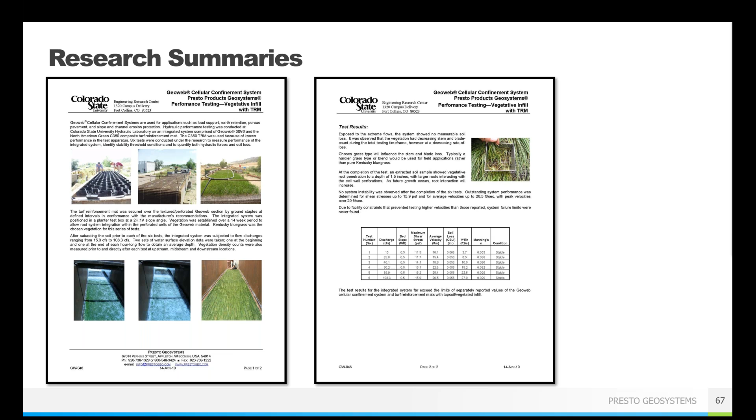So part of our complete solution is our technical assistance. The engineering team here works closely with landscape designers, engineers, owners, contractors, offering free project evaluation services for any type of GEOWEB solution or any of our other products. And so the form is on our website at prestogeo.com. You fill it out with as much information as you have. You can attach documents such as geotechnical reports, site photos, any other info you have, that sort of thing comes directly to us.

And then pretty quickly, usually 1 to 2 business days, our engineering team will provide a complete evaluation, and that includes infill recommendations, anchorage requirements, whether or not we recommend that geosynthetic underneath the panels. If we're talking energy dissipation, we're talking that as well. All of the things that you are going to need to get the best solution for your project.